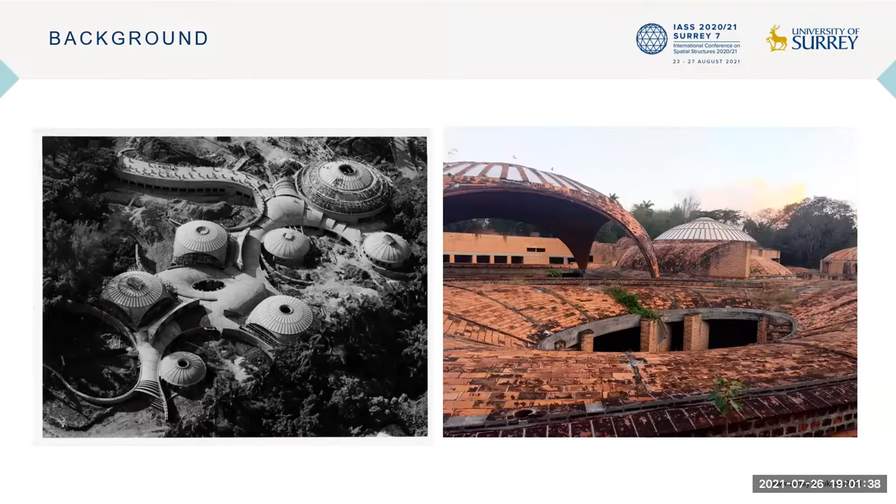The 5 schools of the University of Arts of Cuba, constructed just after the Cuban Revolution, have been well studied architecturally since their rediscovery and launch to international fame in 1999. But their road to recovery and preservation has been long. Environmental mechanisms and years of disuse have caused decay, particularly to the ballet schools. This and the cultural value has motivated the current study of these structures.

Also, more detailed site and archival studies were enabled by a grant from the Getty Foundation in 2018 to fund preservation planning for the ISA campus. This new data has enabled, in turn, these more detailed structural studies. They aim to diagnose the structures, discuss the structural efficiency, and provide intervention recommendations for the preservation plan.

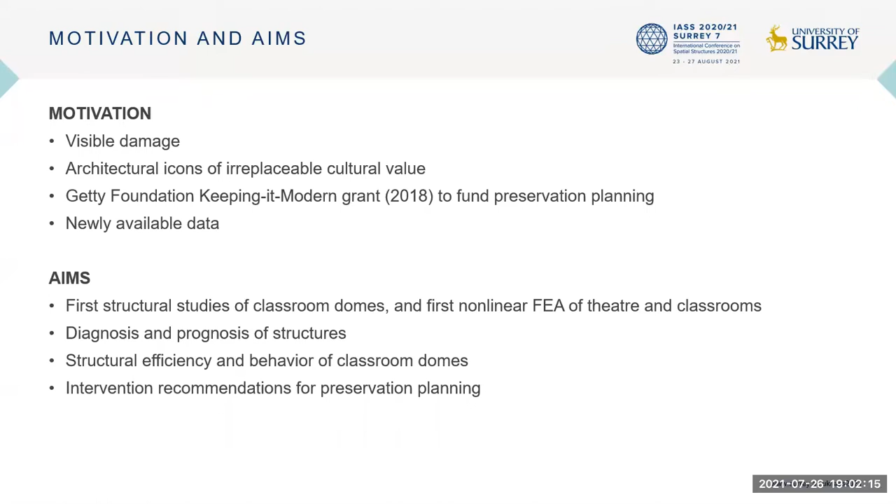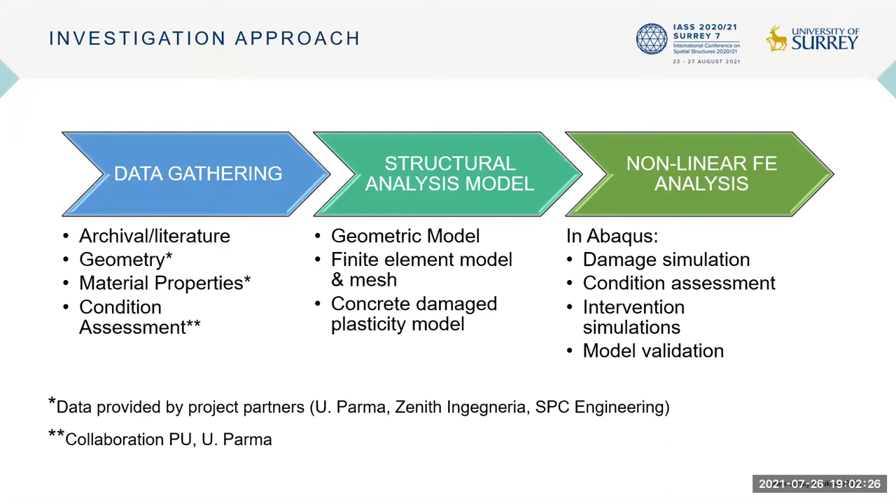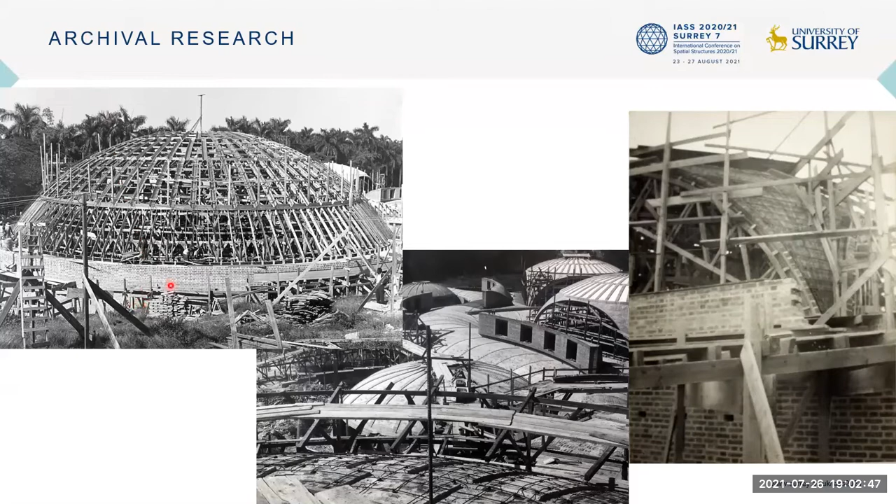There are 3 parts to the investigation. First, data gathering, including on-site and archival research, the creation of the structural analysis model, and lastly, the nonlinear finite element analysis. The archival research led by Sofia Celli and Davide del Curto helped reveal the construction methodology and section properties. The vaults employ a composite tile and reinforced concrete cross-section, some details of which are shown here for the large theater dome and then for the smaller classroom domes here.

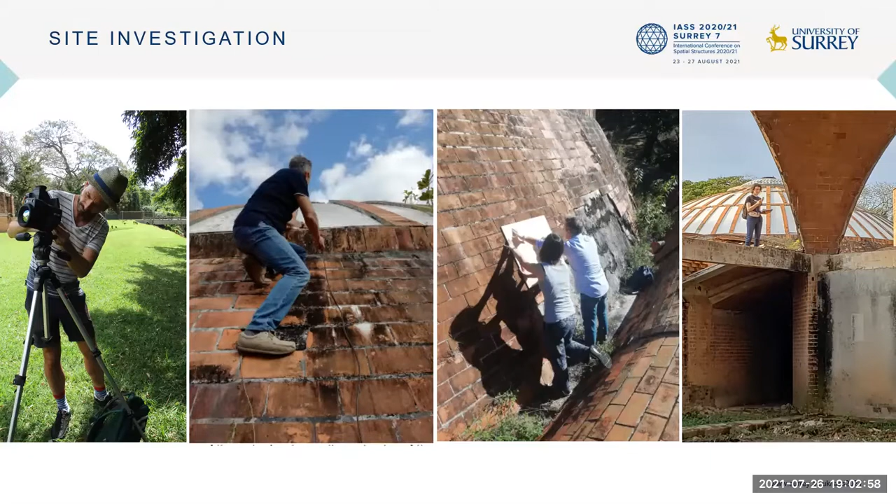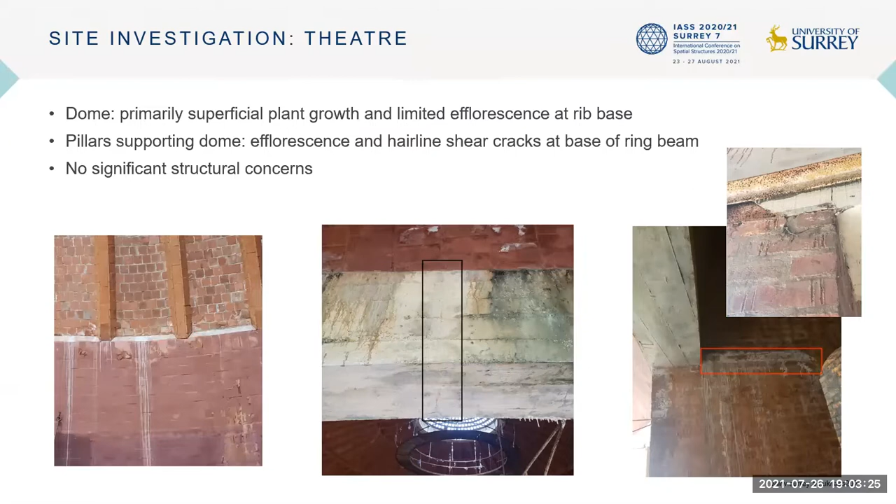We inspected the theater dome, which has a 30-meter span, and no significant structural concerns arose during this. The dome has some limited efflorescence at the base of the rib and some other crack indications at the ring beam mid-span, and then where the ring beam frames into the supporting pillars. But again, these seem to be normal lifetime reactions and not significant concerns.

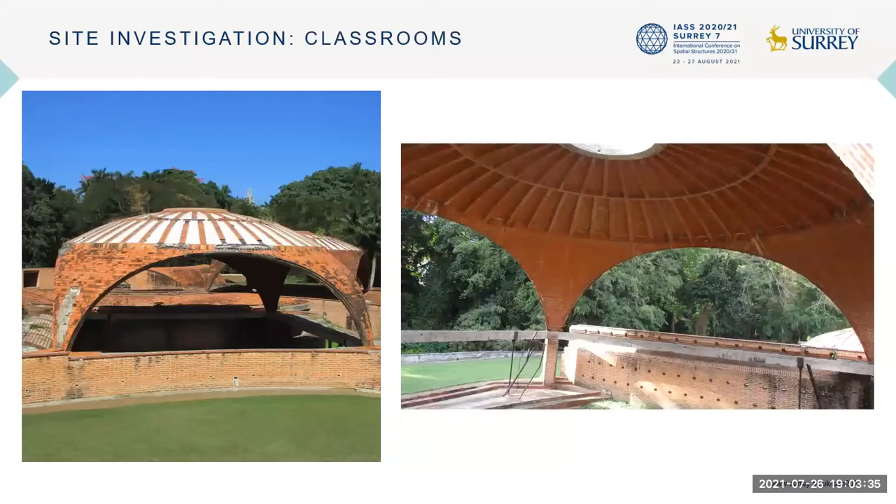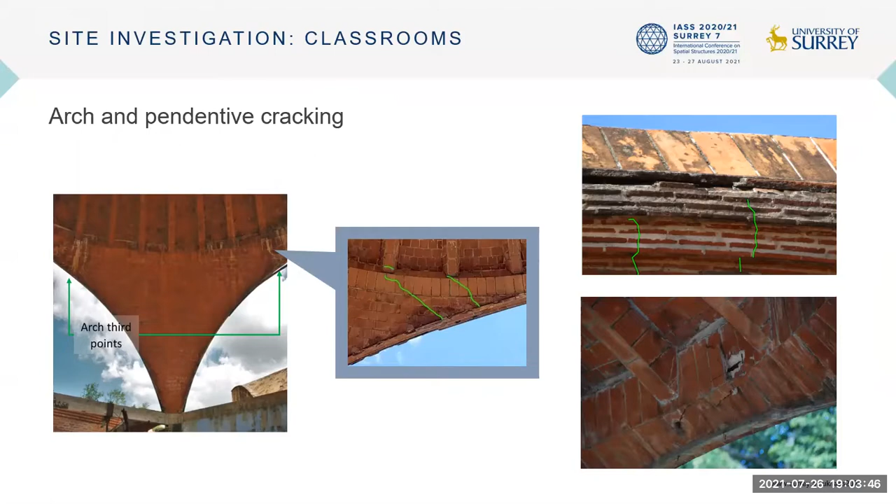For the classroom inspection, these are a more unique and daring form, and this is seen in the damage evidenced. Within the arched edges, there's cracking from the 3rd points upward, and you can see some corrosion and spalling at the apex. The pendentive's extrados has numerous tile and, where visible on the right, concrete cracks.

We made crack maps to compare the condition of the pendentives to each other, and these indicate that even where not visible, there are 2 or more major tensile cracks in the concrete section at the interior of the pendentives. This discovery is concerning and adds urgency to the structural analysis.

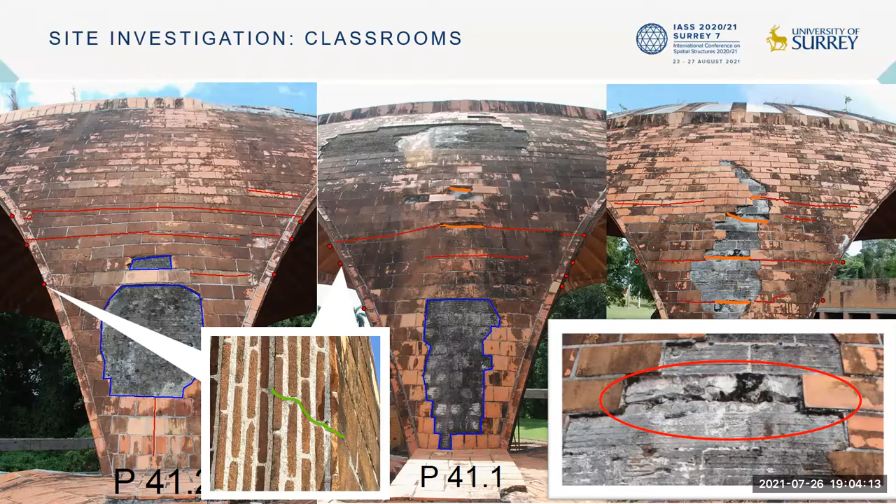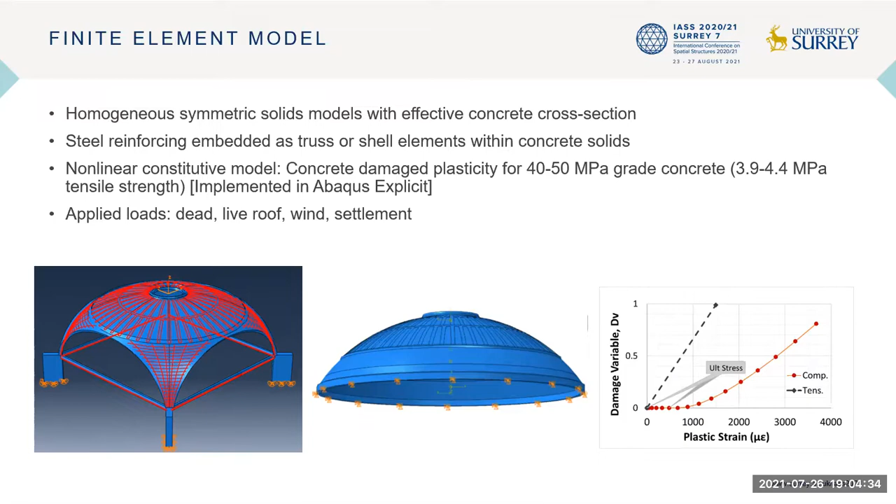We created the finite element model using a homogeneous symmetric solids model and embedded steel reinforcing, the red shown on the left figure. For the nonlinear constitutive model, a concrete damaged plasticity was adopted and implemented in Abaqus Explicit. Applied loads included dead, live roof load, wind, and settlement.

For the theater, the finite element results show that the upper spherical dome is primarily in compression, as expected. Slight tensile damage exists for all cases at the rib base, but is not significant enough to cause concern. There's also some slight bending-induced cracking in the ring beam under differential settlement.

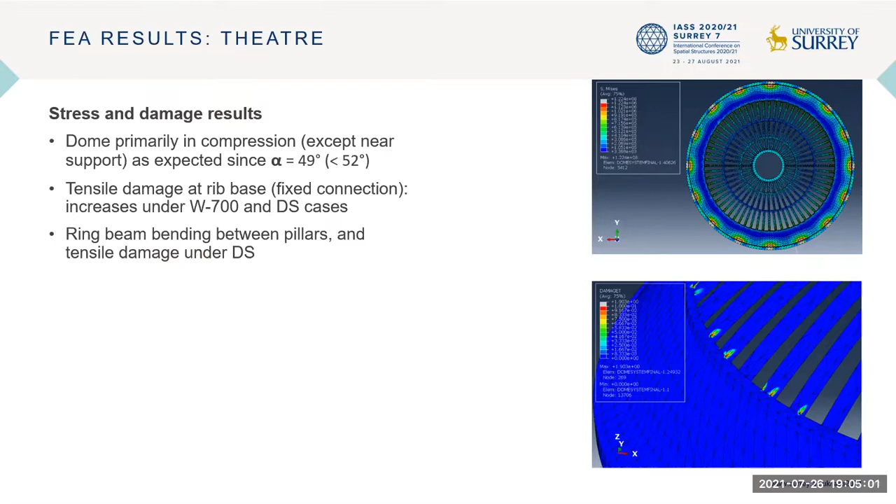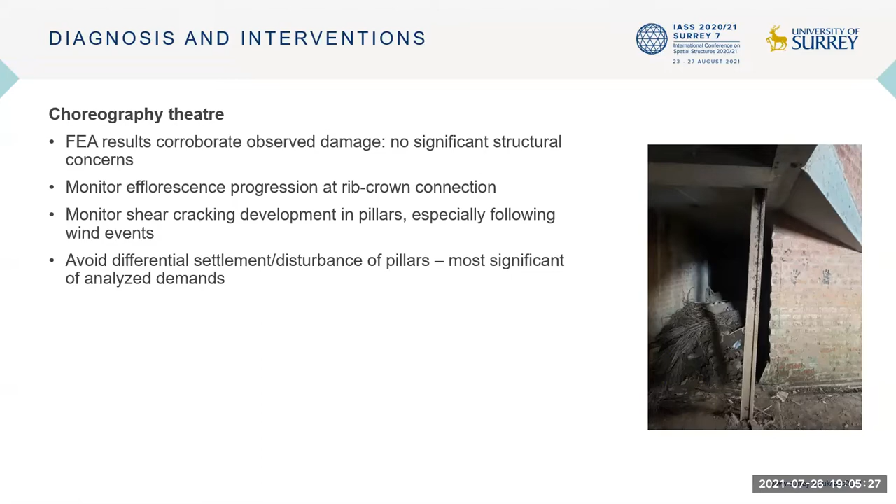Consequently, the FE results corroborate the observed damage, that there's no significant structural concerns for the choreography theater at this time. But we do recommend monitoring the efflorescence progression at the ribs and the shear cracking development in the pillars to see if the damage accelerates due to any causes and should be addressed at a future time. We also recommend avoiding differential settlement or disturbance of the pillars, as that's the highest demand that was analyzed.

For the classroom, the FE results show that there's a high bending demand throughout the dome, primarily at the base of the pendentives, at the mid-height, and then at the apex of the arch, seen there. Also, it revealed that there's insufficient tension stiffening in the pendentives, as the rebar is shown in compression here at the same location of maximum tension stress in the pendentive extrados.

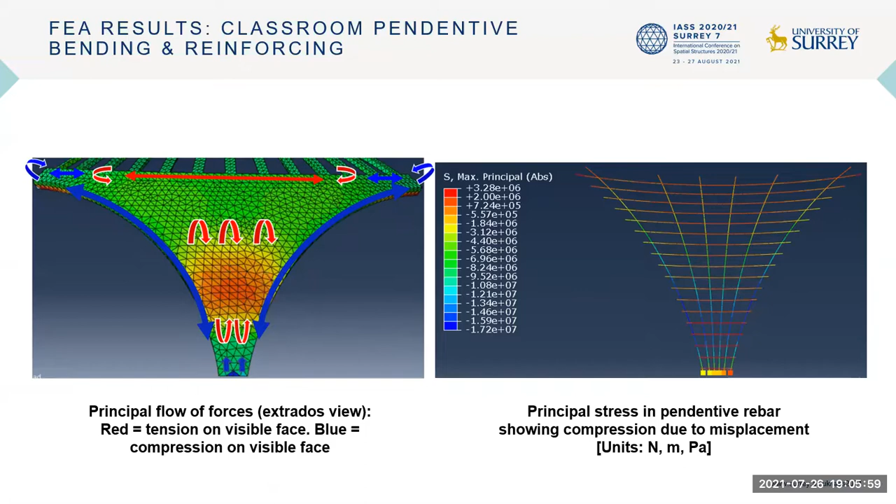The damage in the classroom can be summarized in 4 major stages up to collapse. First, tensile cracking occurs at the arch apex and pendentive base. And then the pendentive horizontal bending cracks occur on the extrados face. Thirdly, flattening cracks occur within the arched region, particularly the upper third, shown here. And then fourthly, the dome collapses when the hinges become fully plastic. And by hinges, I'm indicating the yellow areas shown here.

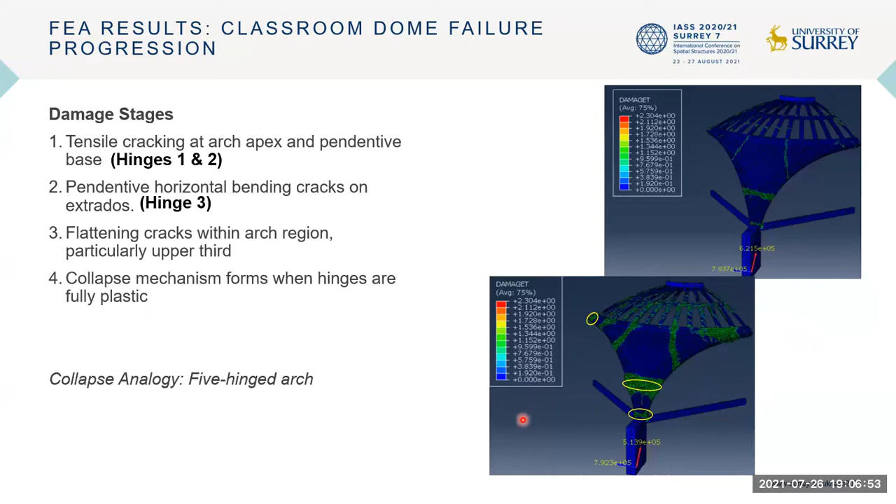And you can understand the collapse of the dome most clearly by comparing it to that of an arch. If the arched opening is an arch, then once these 5 hinges become fully plastic, a mechanism is completed. We validated the model by comparing the pendentive crack maps to the model stress and tensile damage, and you can see the good correlation evident there.

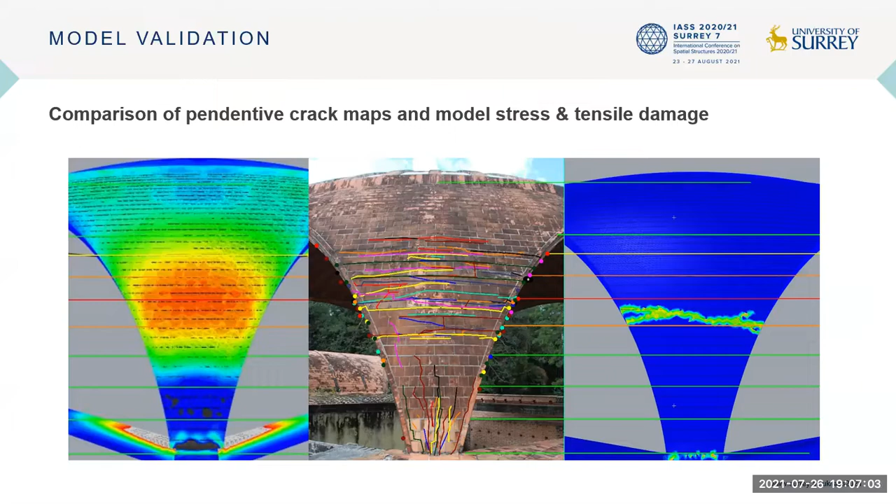In lieu of conclusions, the diagnosis of the classroom domes is not encouraging. The domes evidence damage stages 1 through 3, which is the 5 hinges initiation and the flattening cracks as well. This means their current status is that of undergoing hinge development, and we don't know how much capacity remains at the critical sections until they become fully plastic.

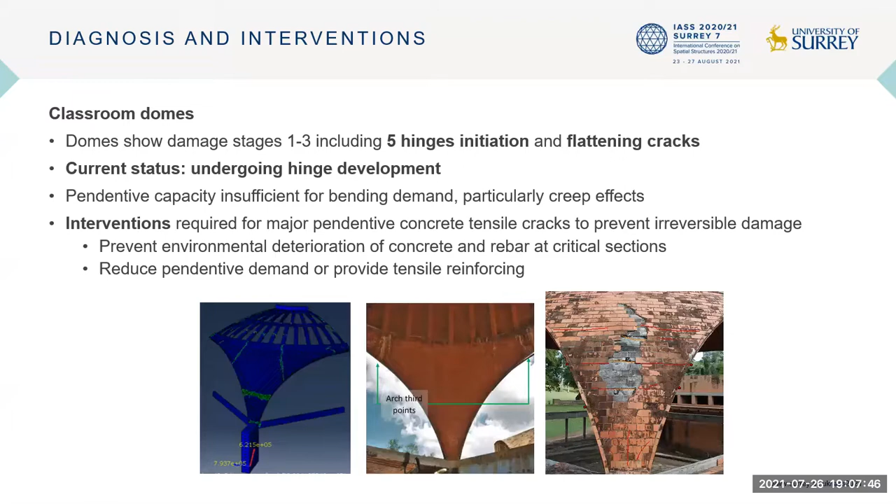Therefore, the pendentive capacity is insufficient for the bending demand, particularly due to creep, we believe, due to the insufficient tension stiffening. So we recommend preventing further environmental deterioration at the critical sections and reducing pendentive demand as soon as possible to stabilize the damage.